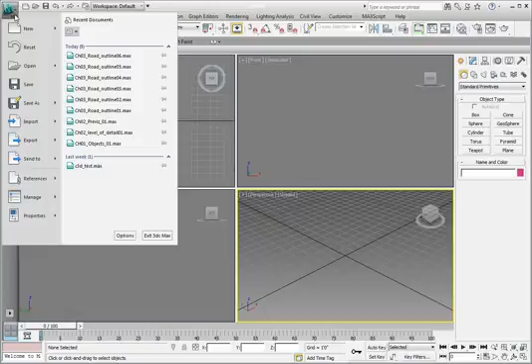Navigate to the Chapter 3 directory inside of the Scenes folder. Go ahead and open the file called Ch03_Hill_deform01.max. You can double-click the file, or you can click on the file, then click the Open button to open it.

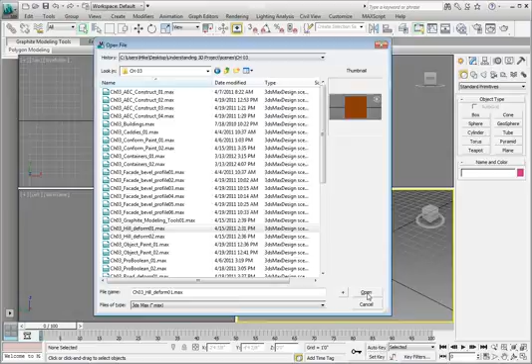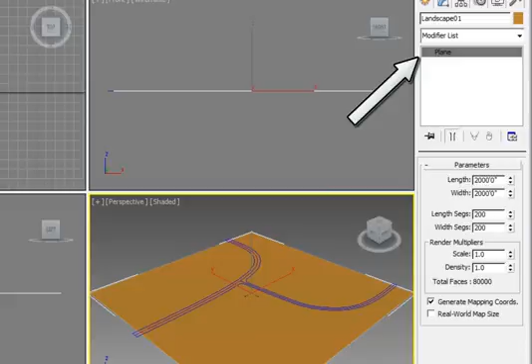The scene consists of a flat plane and our road objects. Go ahead and select the flat plane object. This object is called Landscape 01. Click on the Modify tab in the Command panel to open the Modify panel. We can see that this is a plane object, and it's also a parametric object. We can see the parameters, the length, the width, the number of segments, and several other options.

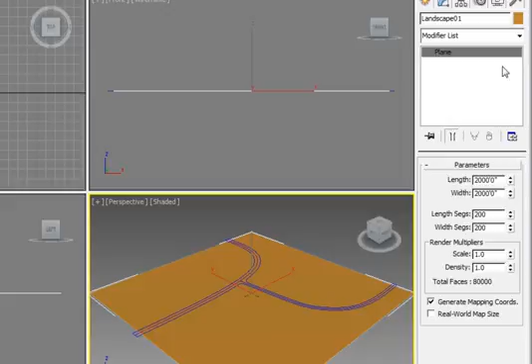In order to work with this as an editable poly, we need to first convert it to an editable poly object. With the plane selected, right-click on top of the plane. In the quad menu, navigate down to Convert to, and click Convert to Editable Poly. Make sure you click Convert to Editable Poly. We don't want to convert it to any other object type.

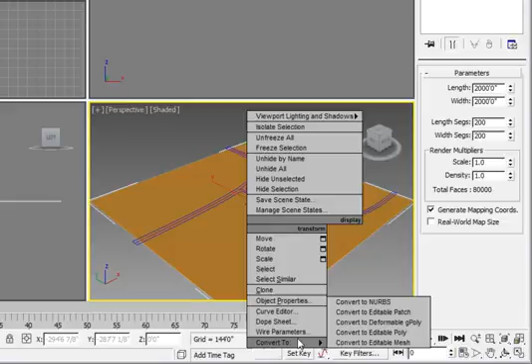The Modify panel now shows this as an editable poly object. We're now able to work at the sub-object level, and we have a new set of editing tools available to us. We're going to go ahead and change our selection method so that we can use a tool later on in our editing process. In the main toolbar, make sure you're in Select Object mode. Currently, we're selecting our object using a rectangular selection region.

Click and hold on the rectangular selection region, and all the way down at the bottom of the flyout, you'll see a spray can. This option allows us to select by painting. This selection method is an alternative method we can use to edit our geometry. Release the mouse button to make the change.

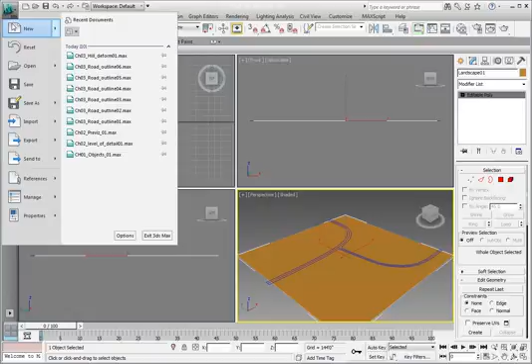In order to make sure that we don't mess up our current configuration and that we have a file that we can go back to if we need to start over, let's save this file with an increment. Click on the Application button. Click Save As from the drop-down menu.

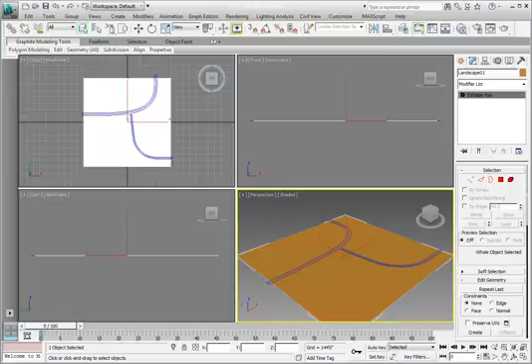In the Save File As dialog, click the plus button in order to increment the name as a new file. If this asks you to overwrite a file that already exists, just click Yes. You are now working with a file called Ch03_Hill_deform02.max. We will use this file to do our editing while keeping the original data in the file 01 intact.